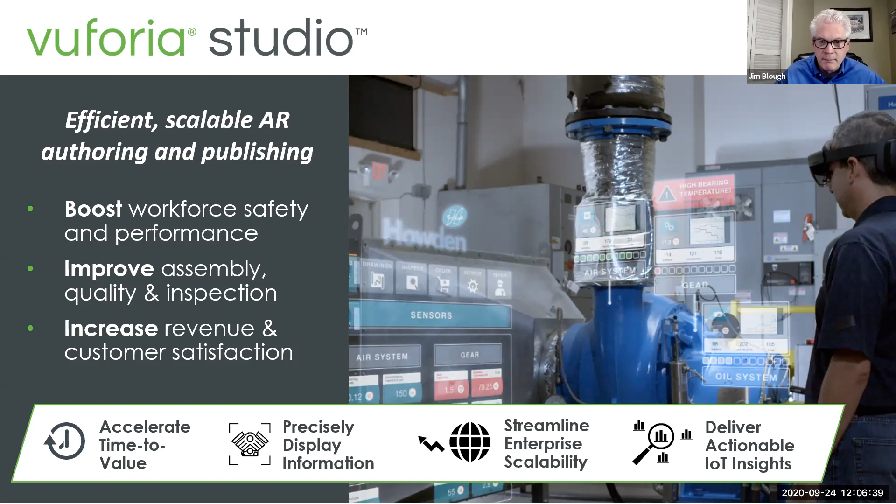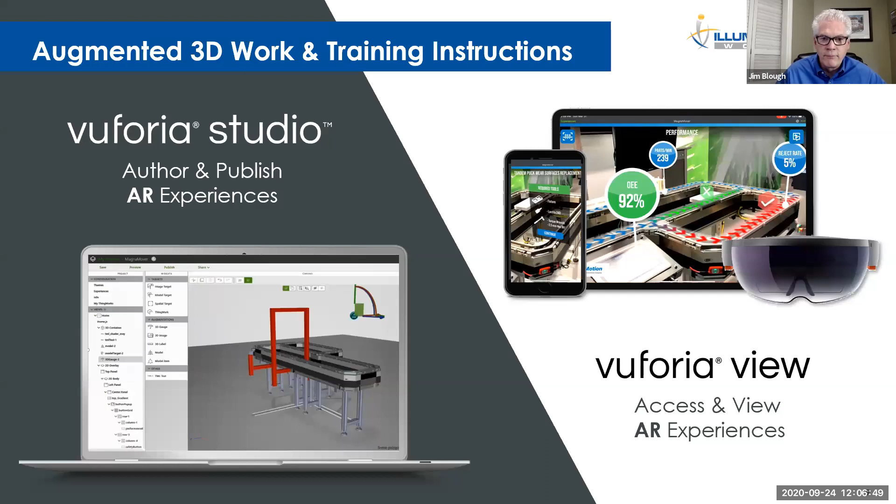So what is this Studio product made up of? The Studio part, which is the authoring and publishing capabilities, and then View, which is how I access and view what I've created in Studio.

So here are the capabilities of Studio. It's a very efficient tool to create AR work instructions, and you'll see from Jon's demo how that really works.

I can easily incorporate not only CAD, but also animated sequences. He's going to show the top of a drill press opening and closing.

I mentioned we can leverage this with IoT data to get better insights and take it to another level. And we can train in and out of context, which means I can take this image, this experience, and place it on a desktop, or I can place it out into my factory.

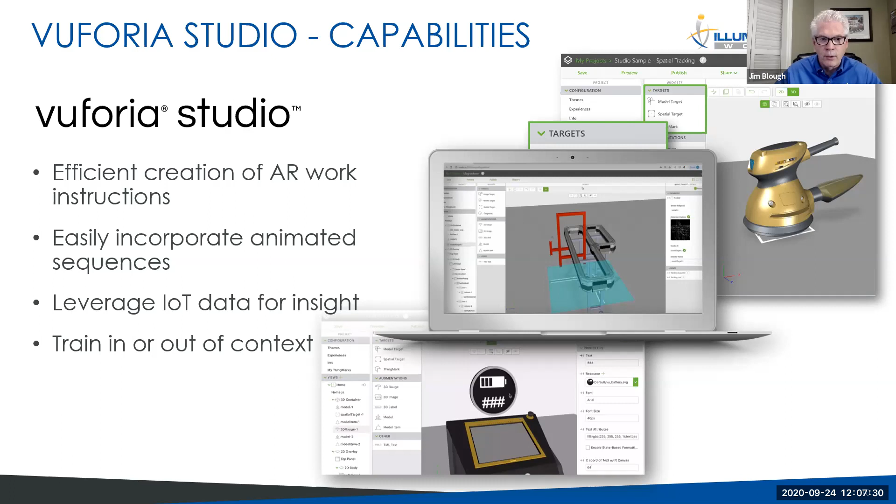That is a free downloadable viewer, whether you have Google, iOS, or Microsoft—you can just download that from the stores. It's universal. So once I've created it, that viewer is the same no matter what environment I'm in.

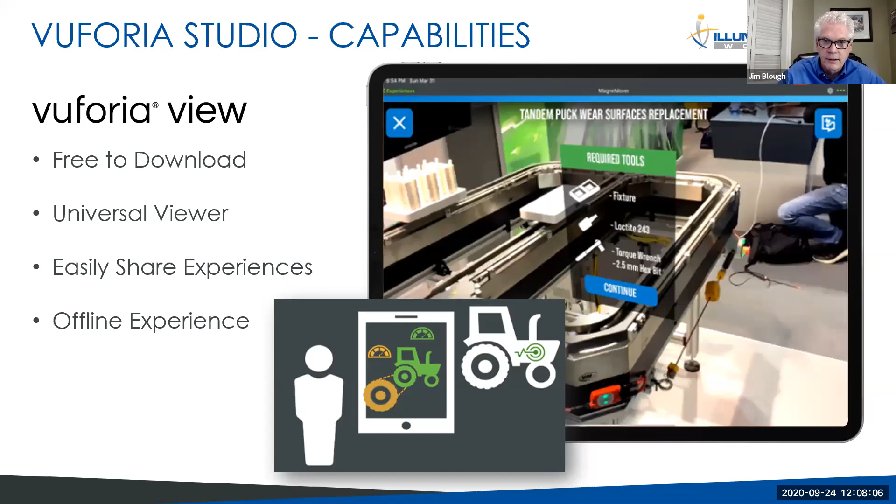Thus, I can share this to all my workers. I can have someone with an iPhone, someone with a tablet, or even a workstation. I can also have offline experiences where I download this to areas without internet access. I can use mobile—Android, iOS, Windows—or 3D or 2D eyewear.

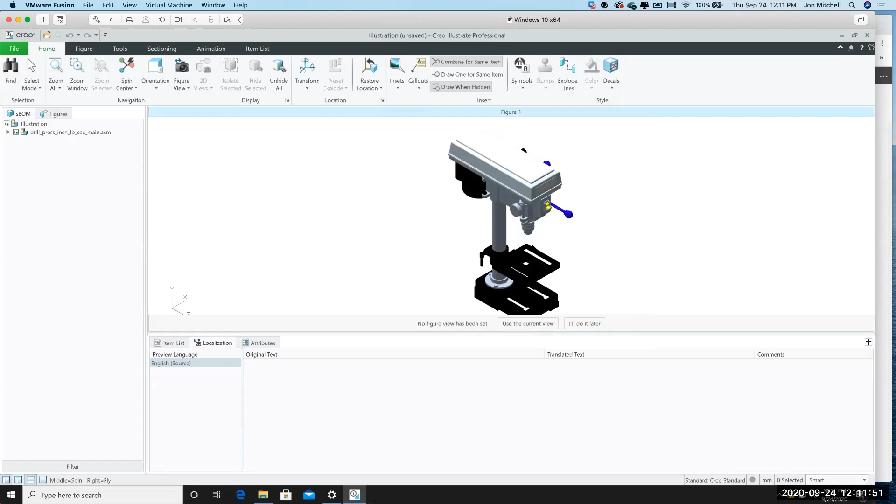And I'm going to create a figure. So when I first start this, I have this drill press as my first screen. Within my illustration tool, I can rotate it, animate it. It's going to present the way it normally does.

But for me, in order to get access to certain piece parts, I need to manipulate it so that I can have access to these upper panels. So what am I going to do from this point?

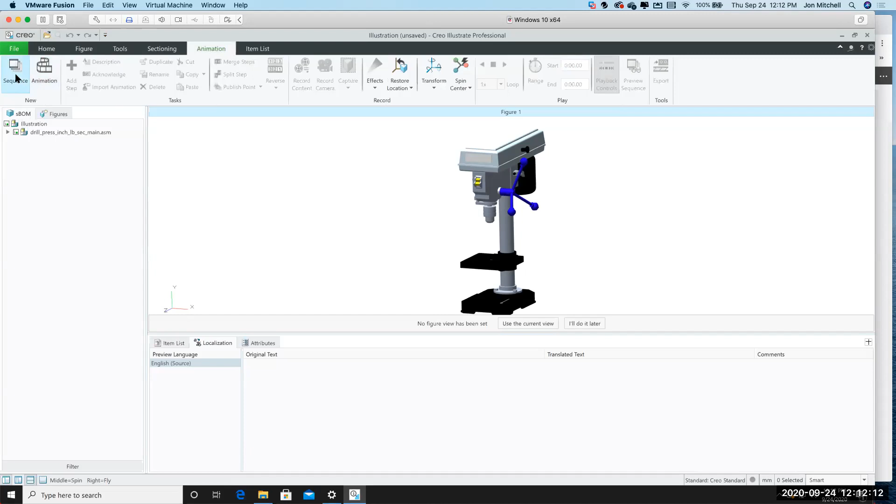I'm going to go to my animation tab and select sequence. A sequence is a series of steps that allows me to play forward and animate the various piece parts of my CAD file, to show a set of procedures.

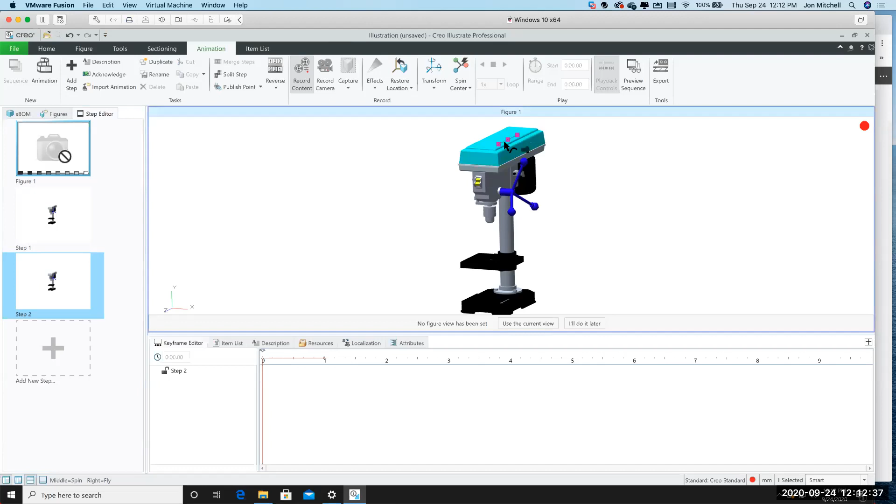I'm going to create a new step by clicking on this left button. And you can see up here, I'm recording content. As I animate different piece parts, it's recording this content, and I'll be able to play it back not only in this Illustrate tool, but in my experience.

I'm going to transform this top to show it moving. Now, I'm not actually moving it like it would be moved on a drill press because I'm using the default axes of this geometry. I'll show you a demonstration here in just a second where I've added an additional axis.

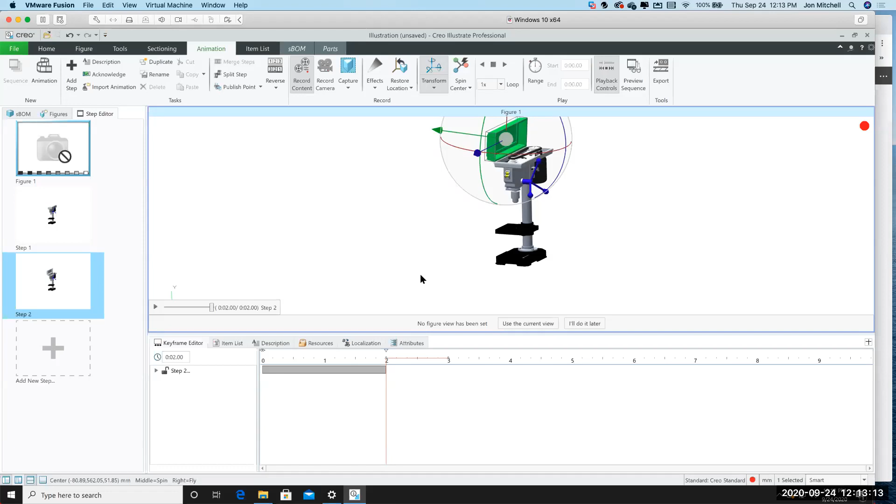Which would be basically the hinges for that lid to show it actually moving. And that illustration is going to be the one we're going to show how to build an AR application with. So once I've demonstrated all the different animation pieces, things like moving the belt up and down, taking it off, I'm satisfied with my procedure. I stop recording content.

I can save this illustration as a file. And then I'm going to publish this into a format that I can use in my AR experience, which is going to be a PVZ file. What this is going to do is going to package up my illustration and my CAD file so that I can then use it in Studio.

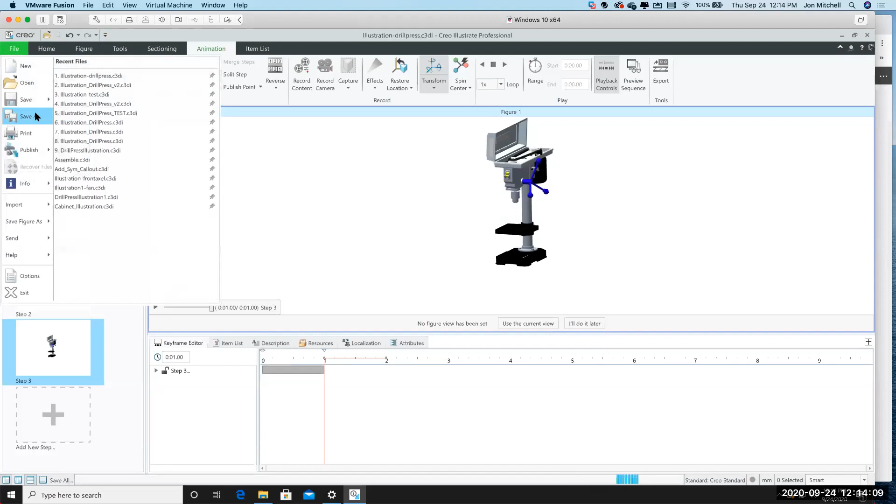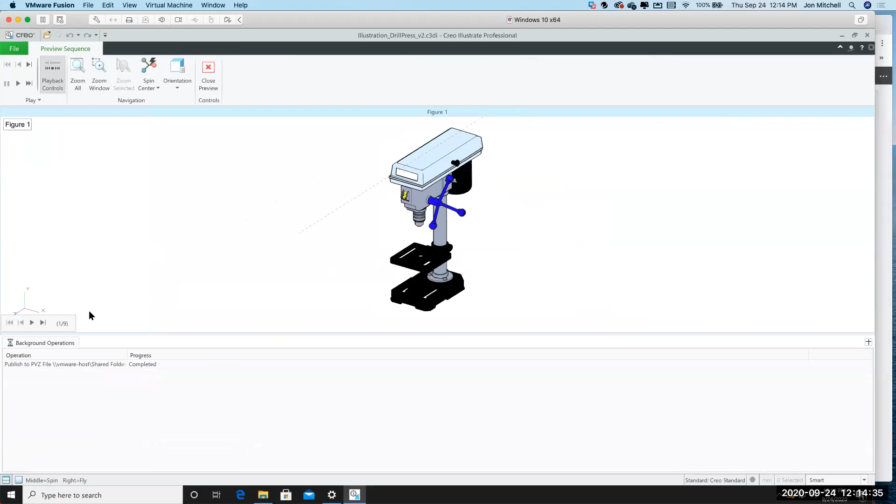I'm going to show you guys really quick the pre-configured drill press sequence of what this looks like if we actually complete it. I'm going to show you the preview capability, which allows me to step through this previously created procedure.

And I've added some things up here like step descriptions. I've animated that to show you this is the part I'm moving, and I've created this dotted line axis to allow that hinge to open up on the correct procedure.

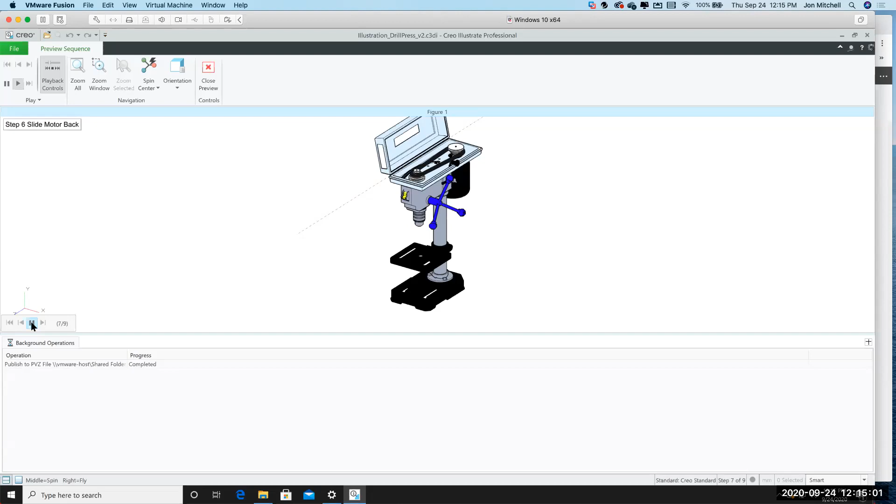I loosen my motor spring, I slide my motor forward, I adjust my belt on my pulleys, I slide the motor back, I tighten my motor spring, I close my lid, and I'm finished.

So once I have this procedure created, this illustration created, I can create and configure my Vuforia Studio project. So for that, I'm going to switch over to a web browser. And Vuforia Studio is an application that runs on your desktop. And these are some previous projects that I have on my computer.

I'm going to click this plus button in the upper right, which is going to prompt me for a project template. I have the opportunity to select 2D, 3D eyewear, or mobile, which is going to be the platform for any phone or tablet. And what that gives me is a predefined template to build my experience on.

The experience service URL is our hosting environment, which for us is our test environment. We're going to initialize this project. And I have a couple different pieces here. I have some major action buttons up here on the upper right. I have my project navigation bar here on the left.

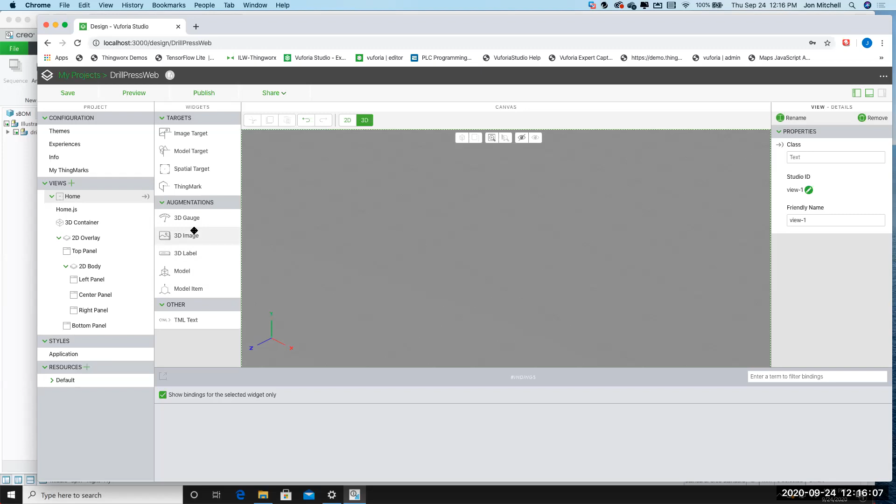I have pre-configured widgets that allows me to drag and drop and build this experience. My canvas is my 3D space. And as you can see, I've got X, Y, and Z coordinates. And over here on the right, I have a window that'll allow me to access the properties of my widgets as I pull them on.

Before I get too far into this though, I'm going to do some configuration. So if I go over here to this configuration section and I click on experiences, we have what's called a ThingMark association. And as Jim mentioned, that's going to allow us to associate specific data. Think of it as I have 10 machines and I want to be able to pull the information off of machine 1 versus machine 10. I have to be able to identify those machines and map that data.

For this particular demo, we're not going to use a ThingMark, so I'm going to select none. And then I'm going to go to the information tab. And on this tab, I have the ability to set some other configurations, add a description. But a couple quick things here. I'm going to set it for public access, which requires no authentication. So once I publish it, I'll be able to pull it up.

And I'm going to set a minimum screen width to tablet because I'm going to choose that as my default. I could have chosen phone, but for sake of demonstration. The other option I'm going to check potentially here is allow download for offline viewing. As Jim mentioned earlier, we have this offline capability. That is an option by procedure that you have to select. I'm also going to hide the view navigation because we're only going to use a single view for this application.

So now that I've configured everything, I'm going to go to my 3D container, which is my workspace. And as I navigate to that, as I said earlier, I'm going to create a spatial experience. What that means is I can place this 3D application on any flat surface. It uses an AI video processor called plane recognition. That's going to allow me to recognize the surroundings and it'll allow me to place the AR application on my desktop here in a few minutes.

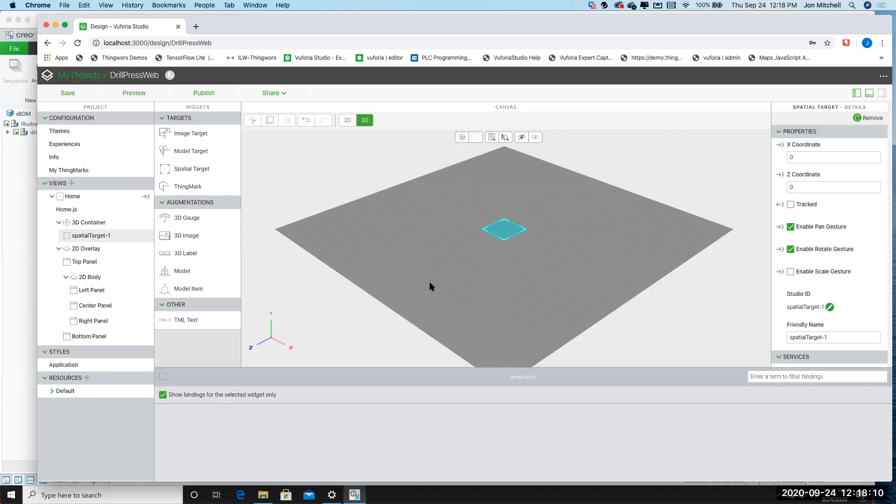I'm going to drag and drop a model now that I have a target so that I can start associating my 3D assets, or in this case, a single 3D asset, to my application.

Over here in my properties on the model, I have to add my earlier created PVZ file. And then I have an option here to run a CAD Optimizer. What this is going to do is take that PVZ file and give me 4 different iterations with varying geometry fidelities that allow me to reduce the polygon count and create a faster download speed for my AR applications. We're going to use the high fidelity one because this is very simple CAD, but with a very complex, rich CAD file, I potentially want to use one of the lower fidelity options as it does the import.

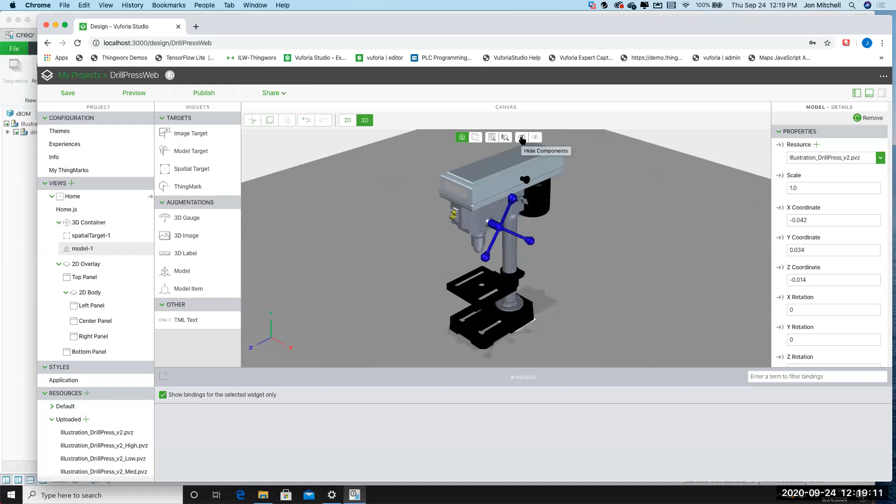The basic canvas that I've created is basically this 3D asset from the CAD file and from the illustration. We're going to set a couple parameters here. We're going to scale it down so that it doesn't show up absolutely huge when we pull it up. And I'm going to choose the sequence. When the sequence was that animation that we created earlier, I'm going to say we want figure 1 to be displayed when I play a sequence.

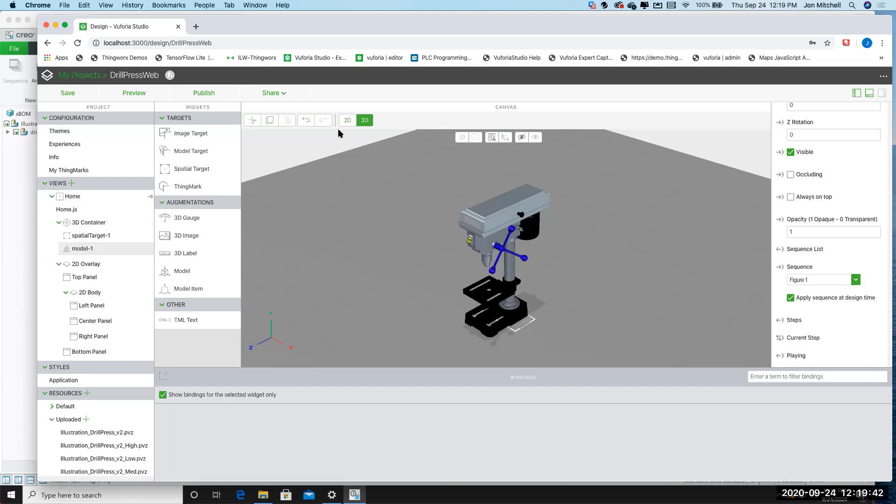Once I have my 3D assets in place and I'm satisfied with what this 3D canvas looks like, I'm going to switch to 2D and add the ability to interact with my 3D application. What you see here are some pre-formatted columns and rows that will basically be placeholders for when I pull up this application on my iPad, allowing me to pre-position different 2D widgets onto the canvas.

I'm going to add some very simple buttons to this application, 4 of them. We have unformatted buttons, so for each of these I'm going to give them a name based on what they're supposed to do. So that's going to be a play all button. That's going to be a play button, which is going to start the animation but put it in step mode. Next allows me to proceed to the next step in the procedure. And I also have a stop button. If I get to a certain point and want to pause my AR animation, I have to have the ability to do that.

Once I have these buttons, what happens when I click on them? At this point, nothing. So what I have down here on the right side is a click event that allows me to say, when I have my AR application up and I click on this button, do something. From a drag and drop perspective, I want to do something on my model, so I'm going to take that click event and it's going to pop up a binding box. By binding this click event to a service or an action, it's going to take action, and I don't have to write any code to get it to do that.

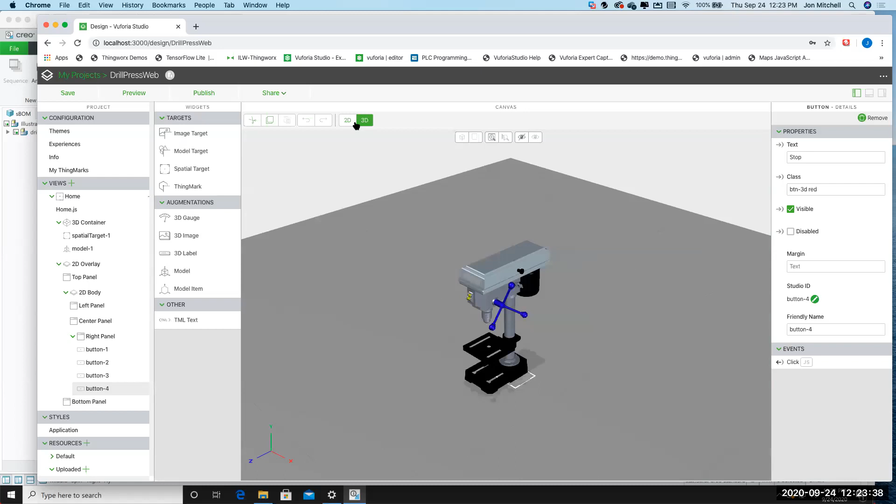As you can see, I've got two different canvases, the 3D and the 2D canvas. I'm editing them separately because of the way the widgets are. But when I click this preview button, it pulls up a separate window that allows me to view my AR experience like it would show up in Vuforia View. I can also test this. I can say play all, and it runs through my animated sequence that shows me how to change the drill press speed. As I stop, it finishes playing the current step in the sequence and then doesn't advance. So in this particular instance, it's not closing the lid.

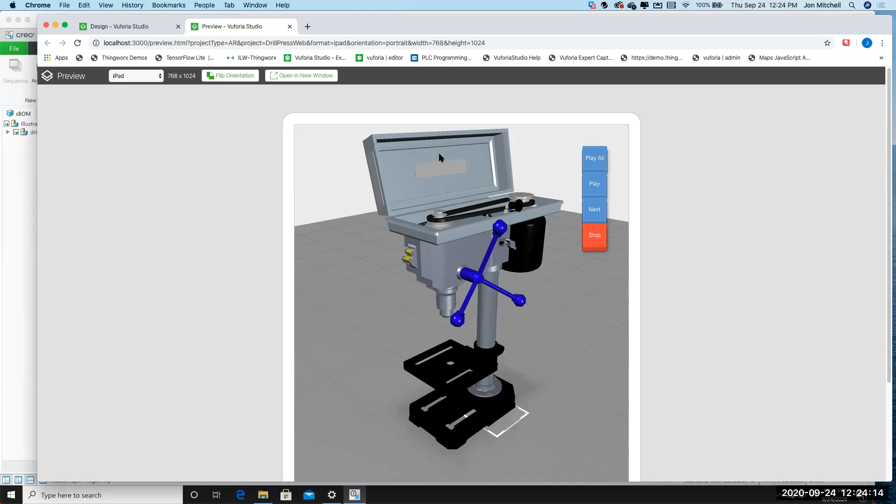So I'm satisfied with my AR application. I can close that preview and save this. I have the option to publish this experience to my hosting environment, AKA my experience service. Within Studio, it should prompt me for authentication. It's going to upload the project, as you can see up here in the window, and then I should get a project published successfully.

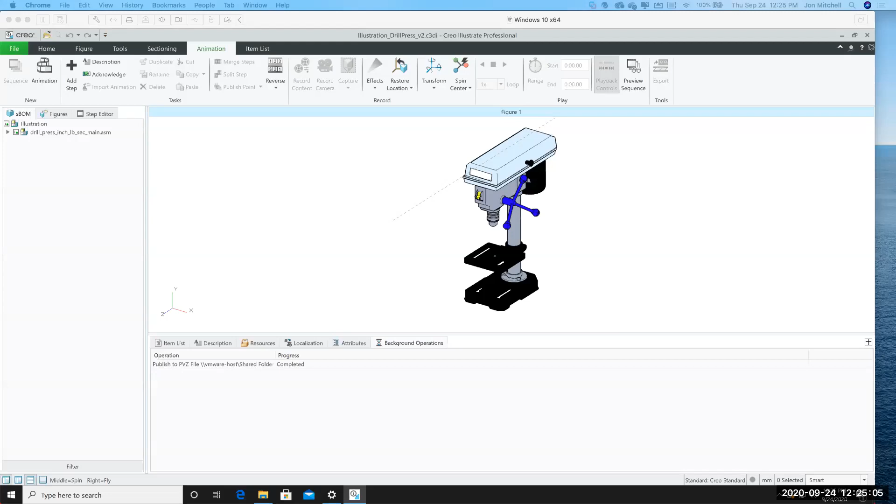Now that that's published, I can demonstrate and show you what this looks like on my iPad. For that, I'm going to use a screen sharing application. And I am now mirroring my iPad to you guys.

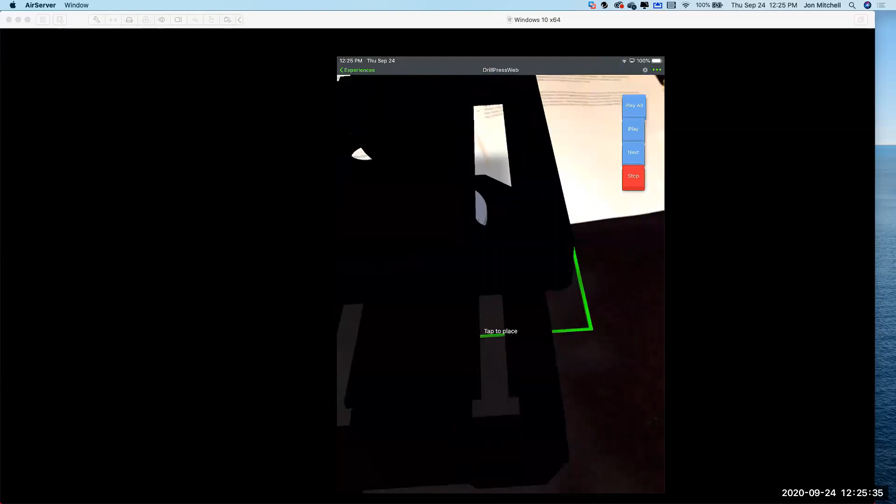So I'm going to pull up Vuforia View. I have a couple different options here. I want to pull this drill press web, which is the experience we just built. And as Vuforia sees my screen, I can place this AR experience in my 3D space.

As you can see, as I navigate around and look at that, I have the full 3D capability. And as I click play all, I'm able to see this in my space.

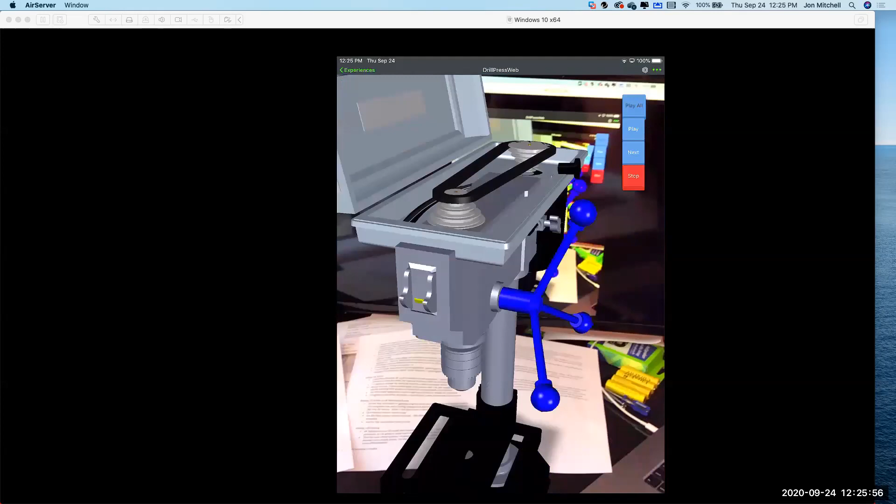Now, as Jim mentioned earlier, there are other capabilities around pulling in IoT data and being able to lock on to physical targets. So I'm able to overlay something like this 3D CAD file directly on an actual drill press, so I could do that in my shop. That's training in context, or procedure execution in context, or out of context.

Those are more advanced topics. So as I said earlier, look for those types of demonstrations later in the fall, November, December timeframe, in our fall series. With that, I'm finished. I'm going to turn it back over to Jim.

Thank you, Jon. So as we finish up, and we're getting kind of to the bottom of the arrow, Jon did a great job of showing the capabilities of Studio. And just briefly want to touch on some of the real capabilities that it brings, right?

So with this 3D immersive environment, as you can imagine, I reduce costs, I eliminate errors, I increase the capability of my workers. As I accelerate training, because I now have this 3D environment where I can really view things, whether it be in context or out of context.

And I can even use this in the sales cycle. Imagine that I'm in a client location and I want to show my product, and I can actually take that AR experience and show that to them and put that on someone's desktop.

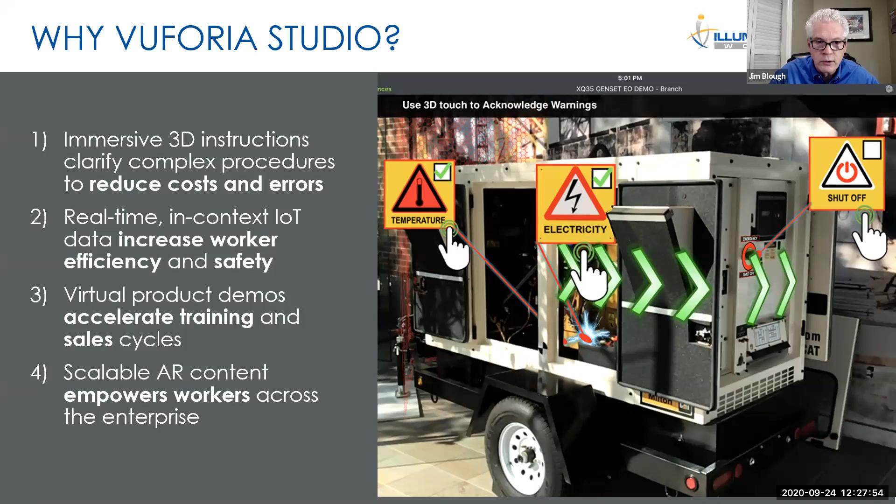So one good example of where this worked out is with BAE Systems. They're a global manufacturer. This specific use case is around the manufacturing of their battery cells for their HybriDrive buses, which are electric buses. They had a huge increase in need for this, as a matter of fact, 350%. And they were currently using instructions that most people use, paper PDFs, and they were having real problems training.

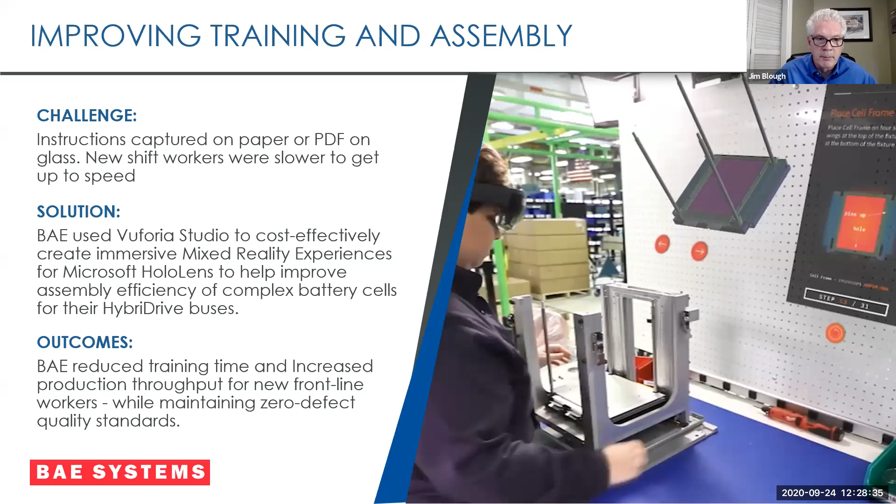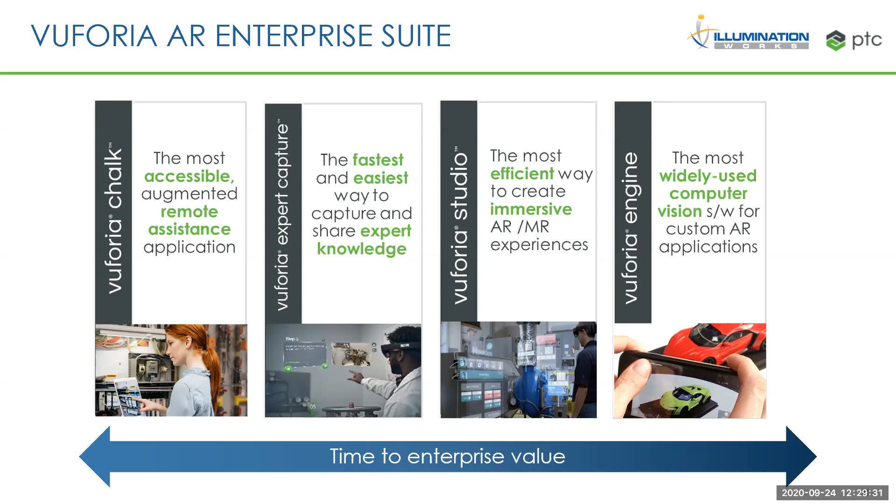So as we have gone through these last 3 webinars, just want to touch briefly again. We talked about Chalk, which is the remote collaboration tool, over-the-shoulder capability. Expert Capture is when I don't have any asset, I don't have CAD capability, I don't have animation, I can still provide that expertise out to my workforce. And then today's Studio and the capabilities of Studio. The basics of all of this is the engine piece of it. So as you can see, a real robust portfolio that is available from Vuforia.